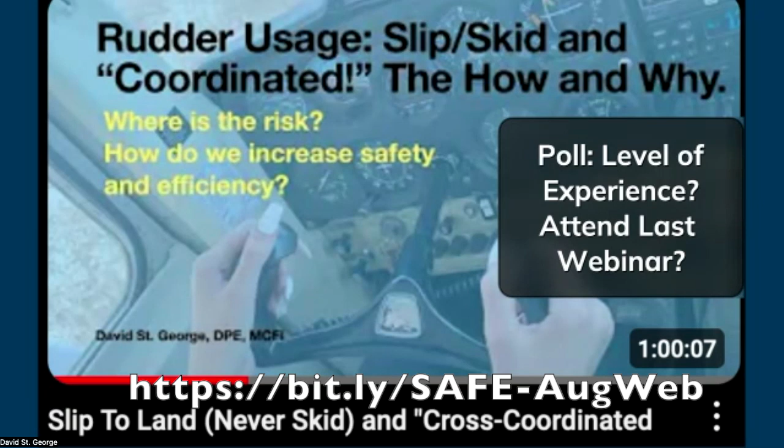As we explained in the last webinar, that's a pro-spin setup. My thought was this woman had 70, 80 hours of preparation for her flight test, and here she was doing it completely wrong. She was going to fail, and she did fail. She'd probably come back after another hour of training and pass, but there's no way we can fix what was done to her as a student. The things she learned were completely wrong, and it's very hard to overcome that initial imprint.

So what we do at SAFE, we're a not-for-profit, we don't sell anything, all we do is give away safety. We have an app online, Safe Toolkit, and a webpage, safepilots.org. I spend a lot of time posting to Instagram, Safe Pilots. I hope you're all getting those resources. We started doing webinars last spring, we did the CFI side of it, and now it looks like we're transitioning a little more toward pilot information.

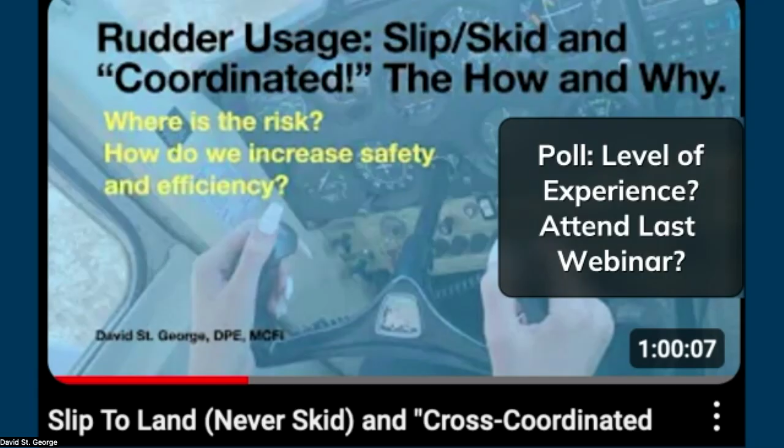So the big focus is stick and rudder tonight. Rich provided this infographic, you'll see it in the chat. The important thing is up top: nearly 80% of general aviation accidents have at least one skill-based error, with this type being the first causal factor in the accident chain about half the time.

In other words, we all fly in a very small comfort zone. I can pop this up a little—you see this area here, we call that the comfort zone. It's probably from 1G up to maybe 1.5, and Rich can probably qualify that. But very seldom in my plane am I going to experience 2Gs, so this is where we do probably 90% of our flying.

Occasionally we'll get outside here into a little more G, maybe a little negative once in a while, and you feel the belt tighten, but we're just happy to be there. What happens in loss of control is we get forced by weather, by ATC, by something out of that comfort zone, and the pilot startles and can't control the plane.

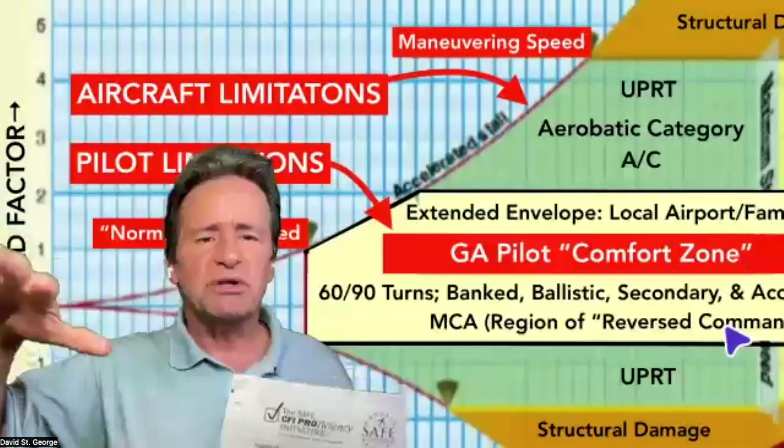So what the extended envelope does, you can see it here, is more of the basic maneuvers you're familiar with, adding a few specialty items. If you look through the syllabus, you'll see turning stalls, ballistic stall recovery, falling leaf, secondary stalls. But my point to pilots is before you go and try to engage in a UPRT course, maybe you want to try that first.

When I was a new CFI, very early on I decided this could be dangerous, and I really wanted to know what a plane looks like upside down. I really wanted an upset recovery, but back in the 80s, they did not have upset prevention and recovery courses. So I went to an aerobatic school and learned hammerheads and a bunch of stuff, but it really didn't apply to my situation. The one thing I see when I read UPRT literature is fidelity—it has to really speak to what your situation is.

So it occurred to me that it was a bridge too far—I was trying to get the wrong thing in the wrong place. What I did was engage this old geezer, a local pilot who's passed on now. I built a syllabus much like what you see in this extended envelope training. It has things going just a little beyond that comfort zone, pushing it out—60 degree banks, falling leafs and secondaries—and it really improves your comfort in those areas. It's a segue into a UPRT course once you know how to use the rudder correctly.

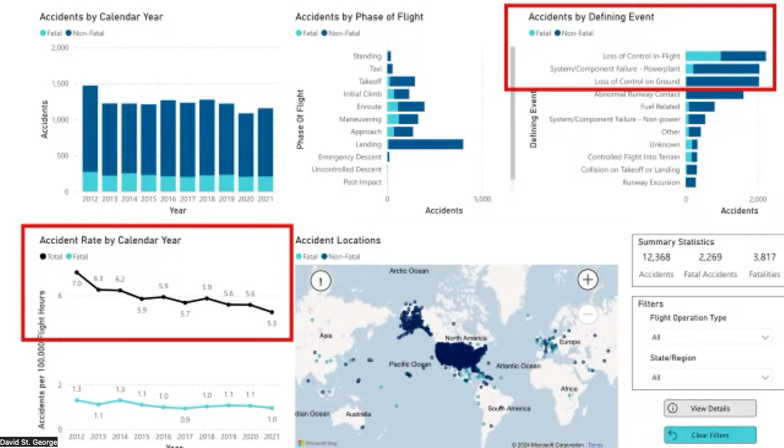Backing up, the NTSB published this for years—loss of control was always on top of the most wanted list. I think they got tired of putting it up there, but if you look at their webpage, and I pulled this up today, accidents are decreasing, you can see that coming down. But at the top of the causal factors is loss of control, and the blue one there, the light blue—I don't know if you can see that—let me put a pointer up.

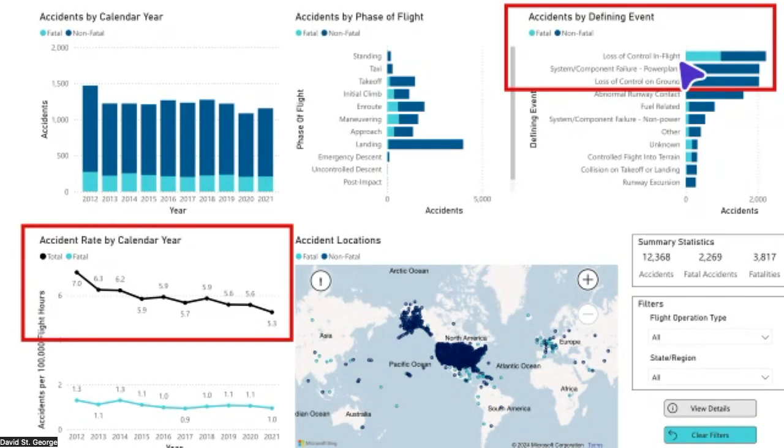That arrow right here, this light blue one, that's the fatals. So it's a very disproportionate number of fatals when you look at the rest of these. Very common for it to be a fatal, even though accidents are coming down, loss of control is still a very prominent problem in the industry. It's easy to forget when you look at things like this that someone died, someone didn't go home. As I say, game over, no replay. This is serious stuff, so practicing and working out of that comfort zone is really a critical thing.

So the course we're talking about is just this, you know, 2Gs, 3Gs maybe at the most, and 60 degrees of bank. I guess 2Gs would be about it at 60 degrees of bank.

So anyway, I'd like to introduce our first panelist, Rich Stowell. Our guest here - this is the NTSB introducing Rich Stowell because he's an expert witness, but his point to the NTSB was, you know, we still have a very big problem in flight training. And I think if you guys are onto the current accelerated flight training, it might not be getting better. It might be getting worse.

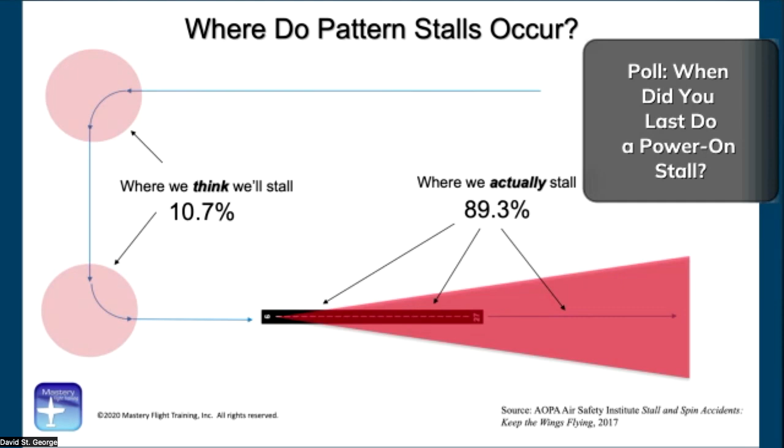Okay, good. All right, so I don't know if you're seeing this too, Rich - Rich's data, he's much more the engineer than I am. I see Greek letters, I start to wilt. But I got about a third probably a week ago, a month ago, a year ago - so it's pretty well distributed. And then down the bottom, some honest souls - 11% said, can't remember, it's been so long.

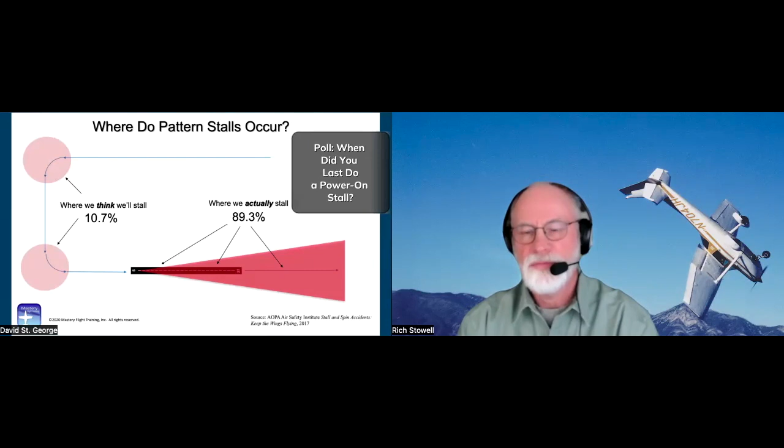So we're talking to the right people. This fact should put a little stiffness into you. If I turn this off, I don't know if I can, you're going to have to bear with me. We go here and switch cameras.

While you're doing that, David, let me just get one clarification about data. I'm a recovering engineer, so let's put it like that. I know when Rich talked to me first about when he learned to fly, he said his first job was in the basement in Manhattan doing plans or something, and he said, this is not at all what I want to do in life.

Anyway, if we take a plane, this would be lesson 1, 2, 3, and I seem to have lost the elevators somewhere down in the studio here, but we don't need that, we just need rudders at this point. As soon as you add the power, it's going to pull off to the left, and you're all going to see that as an early CFI.

As a student, that's part of what goes on. What you have to remember is that when that happens, it's yaw, and what we should be correcting for it is with the rudder. When I do a DPE, sit out there, take a test, and I'm walking around the plane pre-flighting, I'll ask, what does the rudder do? And I get the craziest answers. There's really not an understanding of what this does. So you have to start that right away.

And the other thing we'll talk about is the whole effect of wind on that tail. So still searching for my lost elevator. Sounds like a Jimmy Buffett song.

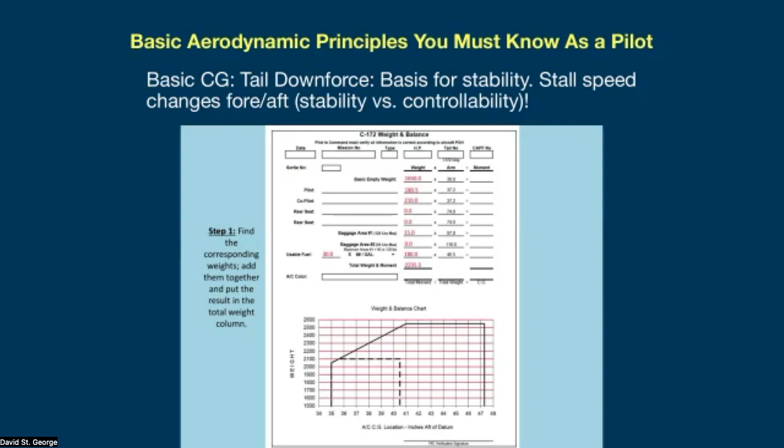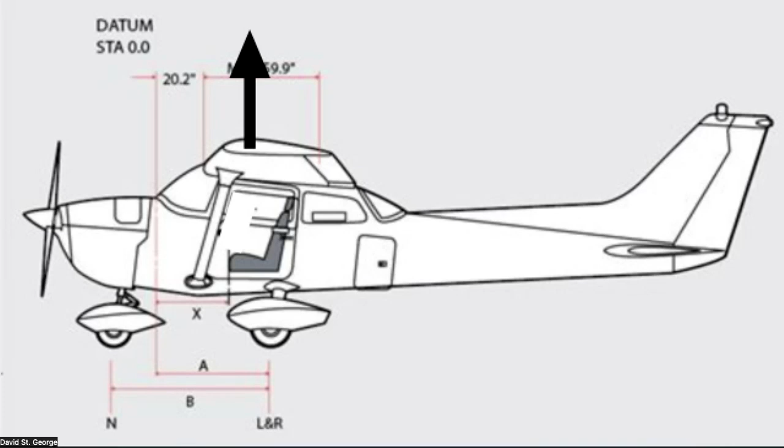Why is there a little box and why is there a big box? What doesn't get conveyed is where that box resides in the aircraft silhouette. If the center of lift is there on the wing, where would you find the center of gravity? Would it be forward of the center of lift, or behind it? Some people might say, as it adjusts forward and back in the envelope, it might be behind. But the fact of the matter is that it really is always ahead of the center of lift.

This seems to be lost in all this decimal point chasing and crazy calculation. People miss the big point that the nose is the heavy part. For most stall recovery, if you just unload the plane and let go of the yoke, the nose is going to come down because it's the heavy end. What does the tail do? The tail provides a downlifting force.

And this you can illustrate to your students in the first flight lesson. If you add more power, the nose of the plane rises, that's pushing wind over the tail. The tail goes down, the nose goes up. If you reduce that power, it loses that downward force and it goes into a series of phugoids until it stabilizes again at a new airspeed, depending on your power setting and where the yoke is. But it's key to everything we're going to do in a plane that you understand the tail lifts down.

The second part of that is this idea that when you add power, you're making more wind over the tail. That affects the elevator, and it also affects the rudder. So people miss that very important point. I know Rich probably has done more spins than I've done takeoffs, but the rudder part is huge for any kind of recovery of a spin.

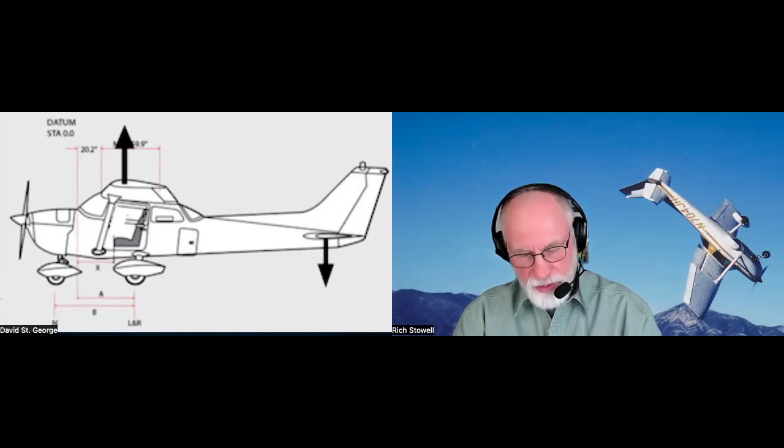Yeah, absolutely. And if we want to talk about the awareness and prevention side of it, because obviously if we're relying on the recovery part, more often than not, it's going to be too late. But being aware that you virtually can't change any other control in the airplane without needing some kind of adjustment with the rudder. Change the power setting, probably need to adjust the rudder, start rocking the wings with the aileron, got to do something with the rudder. In some cases, even pitch changes require some change in rudder pressure. So the rudder is indelibly linked to most everything we do with the airplane.

And so from an awareness and prevention point of view, if we can cancel the yaw ahead of time, we don't have to worry about using a full opposite rudder to stop a spin. I think 90+% of accidental spins occur at or below 1,000 feet, already too late. So we're already in the traffic pattern.

Back to you, David. Yeah, I like that. And the point you made, I think when I was listening last year at Oshkosh, maybe it was you or someone else, every change you make to one control has a secondary and a tertiary level of change. As flight instructors, we tend to just teach ailerons with rudder, and we forget that pitch is part of it. Everything has got to be meshed together.

And the point Rich was making on that infographic up top is we really have to burn these into the student early on. Our learners have to get a feel for the plane, its muscle memory. Because when bad things happen, the cognitive part of it is often, as Ed Wischmeyer says, unavailable. The rudder really has to become habitual and absolutely a best friend of these people.

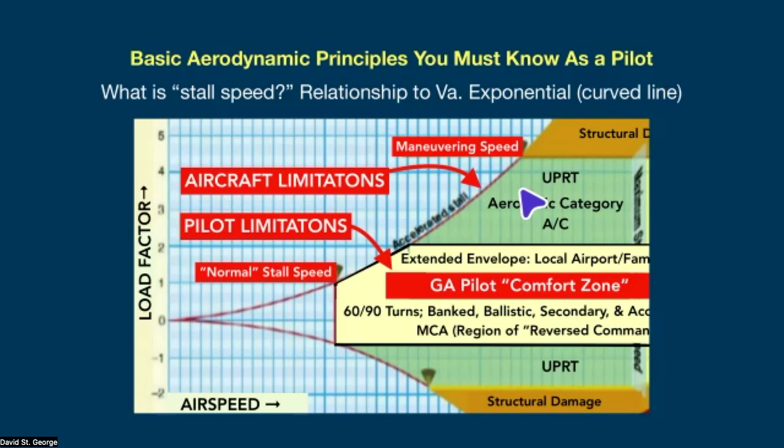We got any questions coming in there? I've mesmerized you all. Yeah, so actually 2 of them, and they are both spins related. One is from Terry Pitts asking the question, for a CFI applicant, does it matter if they do their spin training in something like an Extra 300 versus airplanes that they're going to actually be training in?

It's a good question, but it's the second question that needs to be asked. The first question is, are flight instructor applicants receiving the depth of knowledge and the depth of spin training that is alluded to in the endorsement in their logbook? And the answer to the first question is no. So it doesn't really matter at that point what airplane they're in.

The other issue is something like a Cessna 172, even though it might be approved for spins in a very limited part of its operating envelope, is actually somewhat spin reluctant. And it can actually create a false sense of the airplane's ability to spin. And of course, when you're spinning an airplane like a 172, you're at a forward center of gravity, lower weight, in the utility part of the envelope.

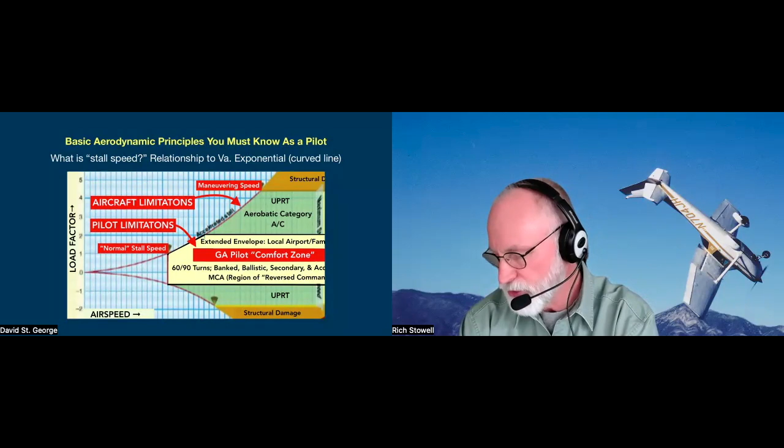But oftentimes, what happens when the instructor gets out of the airplane? The pilot loads the airplane max gross, 3 of the biggest friends they know, and they try to depart off of a high density altitude airstrip, a totally different kind of airplane at that point. So it's much easier to stall spin an airplane with improper control inputs at the aft part of its approved envelope, as opposed to the spins approved front part.

So I would say, first of all, we need to make sure flight instructor applicants are receiving training so that the endorsement rings true and that they are competent to teach spins, which at this point in my experience is more often not the case. And then it doesn't really matter what airplane. I would say you want an airplane that if you command it to spin, it will spin, not 50-50 or 30-70. You want consistency in the spin training environment.

Chances are, if you go to something like an Extra 300, very high performance, but it behaves in a spin like a Decathlon or any of those other classic spin training airplanes. If the question were, if you were going to learn rolling upset recoveries in something like an Extra, all you got to do is tap the stick like that and you're upright. So that's maybe not an ideal transference of knowledge to a 172, where if you had a rolling upset, something like a Citabria or Decathlon might be a little bit more appropriate.

Vince asked the question. He did training in the A7D at 30,000 feet. And of course, an A7 does not have the same mass distribution as most of our light airplanes. He asked, why don't we in general aviation use ailerons with spin recovery?

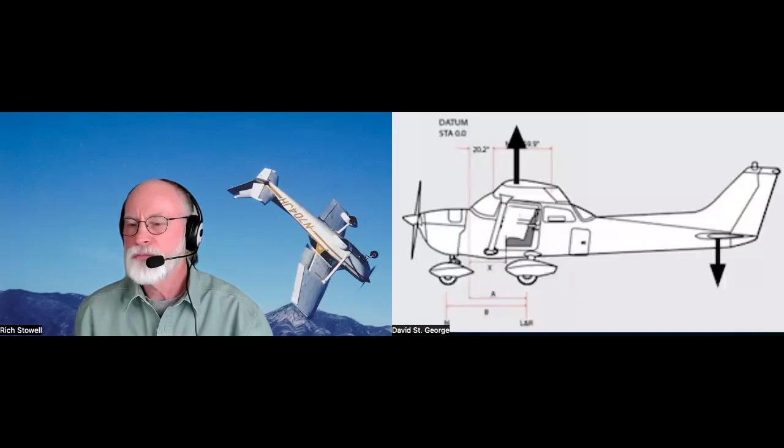And there's the tail, and what I said about the wind on the tail, Rich was the one who really publicized that PARE spin recovery. Why do we get the power out so soon? Well, the power is pushing the tail down. It's making that plane spin flat. It's not going to recover the stall unless the heavy end comes down. So power out brings the nose down and the recovery starts.

You have to understand the very basics, or all of this is lost. If you don't understand this part, the spin part is lost too. Power in and out is a very important motivator of that tail. That's what gives it the force to recover or not.

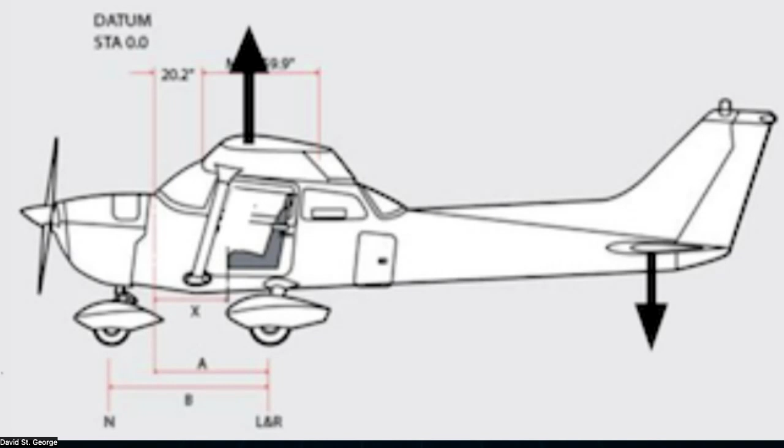Anything else on the spins or questions there, Rich, in the chat? Yeah, so I think there's one question from Howard. He hasn't read the syllabus yet. So Howard, I suggest you go ahead and download that from the link that Nick put up already.

What do we do with primary students to train outside of the comfort zone? Part of that, I think, is to start training less specifically to the test. I mean, that would certainly help. And while we were having our practice session, I mentioned to David, you want to talk about getting out of the comfort zone. Why don't we actually train our students per Advisory Circular 61-67 Charlie change 2, which is the current one, stall and spin awareness training.

It's the required training, and it has a whole lot of different maneuvers in there that are very good maneuvers to do with people, so that when they come to UPRT with me, I see Mike Clock is on the call with us here out of Bend, Oregon this evening.

We spend half of our time just doing the expanded envelope exercises that people like Ed Wischmeyer do, or the extended envelope training that David's talking about, just to get them to the point where we can talk about going upside down in an airplane or doing a spin. So I think there are a lot of things we can expand on naturally in our training environment, in addition to what David's put in the syllabus, but also looking at AC 61-67 Charlie and integrating those elements in. As a flight instructor, if we're not comfortable doing that, we should find another instructor who is and get comfortable doing it so we can pass that on to our students.

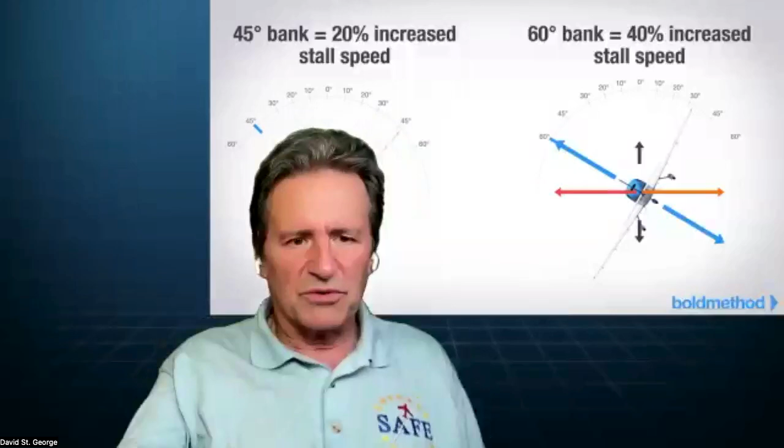But then let's get into this part here, let's see if this will change. Yeah, here we go, and I'm sort of blocking that. Let me see if I can make myself smaller or get out of the way. As we bank, this is how we're adding load to the wings, right? This is the basic square root function here. What's amazing to me is if I were to ask somebody, 45 degrees of bank, how much load does that add to the wings? This is one of the questions I have running on one of my seminars, and I get answers. About half the people say it's got to be at least 2 Gs. It really is only a 19% increase, and it's not scary. 45 degrees is not much at all.

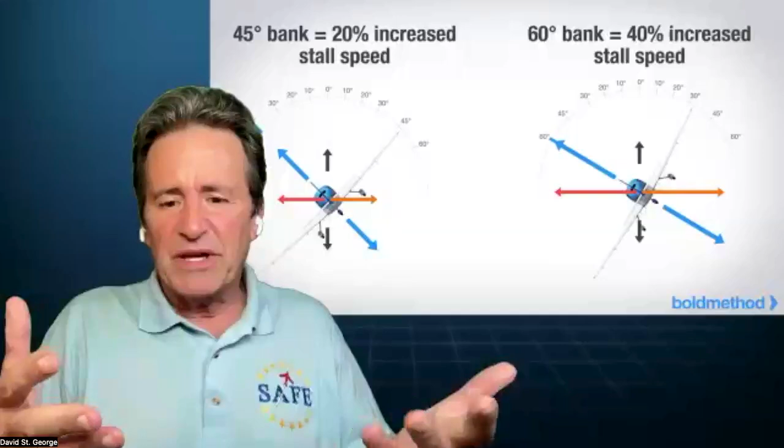What Ed Wischmeyer and myself do in this course is what's called 60-90s. We bank 60 degrees, we turn 90 degrees, and we reverse it. What I used this for initially was when I got instrument students and was going to start them on commercial. You all know an instrument student has been droning along for 40, 50 hours, making standard rate turns, very gentle, staying trimmed, everything's there, and the plane is flying itself under a stable configuration. They haven't banked more than 20 degrees in about a year, or in an accelerated program it'd be different. So I would take them out and do 60-90s.

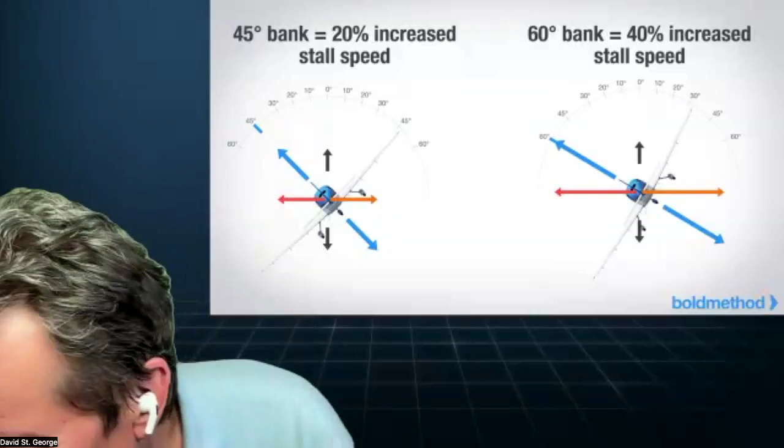We'd do falling leaf. When we do a private pilot applicant in the ACS, it says we can do a 20-degree bank turning stall. Well, we might as well get into it. I don't know if this will show up with the silhouetting, but if we take a plane, I try to get the light on it just right. There we go, and it's turning, it's banking. The lift is where? That's one of the questions at the end, is the lift equal on the wings?

People often say the outer wing is going faster, so it's got more lift and you need opposite aileron. But in a moderate 30-degree bank turn, level and coordinated, the lift is equal on the wings, or it would still be rolling. The ailerons aren't doing anything, the rudder shouldn't be doing anything, yet we see pilots with all kinds of control pressures cranked in there. The only thing working is the elevator, and the elevator is turning the plane.

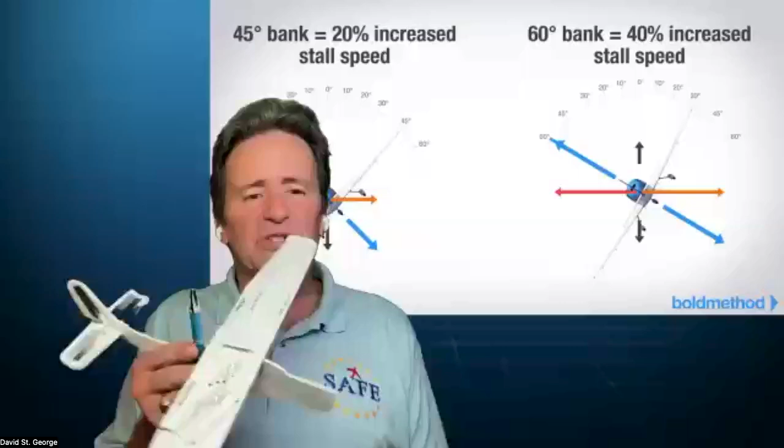This is the whole basis of what Rich teaches, you can go to richstowell.com and see Learn to Turn. The whole idea is people don't understand what the controls are doing in a turn, and the turn is how they get themselves in trouble because they don't understand the forces.

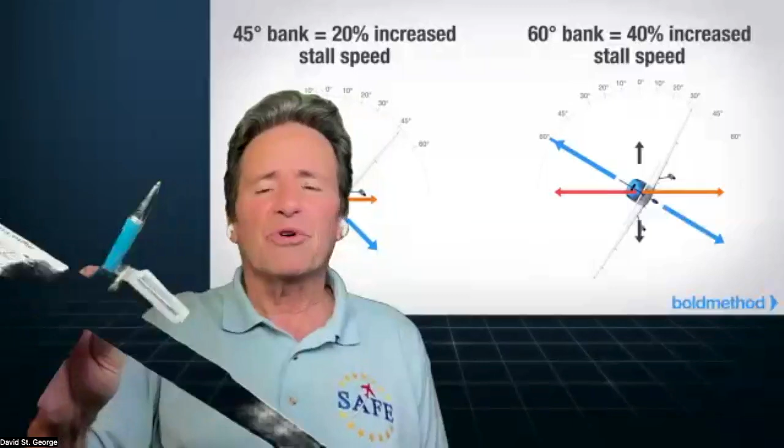This is Aviation 101. It's unfortunate that in most syllabi, people get rammed into stalls on lesson 3 and never really learn how to fly a plane. We're really pushing for lesson 1, 2, and then lessons 3, 4, 5 to be ground reference maneuvers, climbing, descending, turns, before doing stalls. If they get into stalls early, all they're going to do is scare themselves because they're not coordinated. If they learn to use the rudder correctly, it makes all of that a lot easier.

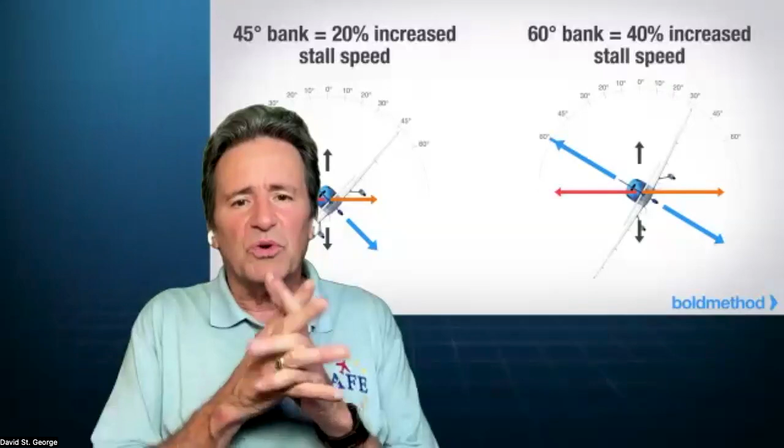The reason we lose people in training is because they get scared and drop out, saying 'I just wanted to have fun flying my family to Maine to get lobster, I didn't want to go up and be an astronaut doing these crazy nose-high things.' At the right time it won't be scary, but if we don't bring them in slowly, it will be. If they understand the physics behind it, they're going to be a lot more comfortable.

So what happens when somebody gets out of this comfort area and ends up here or down here? What happens is, you've probably heard the word mentioned, startle. Ed Wischmeyer talks a lot about cognitive unavailability - basically we panic, the brain shrinks, and it's survival mode. Whatever muscle memory you have is what you're going to react with. If you were trained in those areas and trained correctly, hopefully you will react correctly and survive.

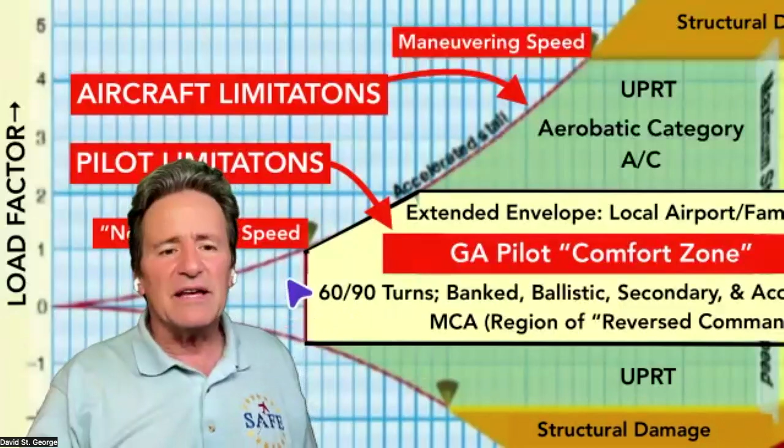But in most cases, people panic and do the wrong thing - they pull when they should unload, because they see a lot of ground, or they add power. My favorite thing is when people are doing spins, the nose is down, and they add power. I still haven't figured that out, but it happens every time - the wrong reaction. So if we're out of the comfort zone, we're vulnerable, especially here. And as Rich said, less than 1G is a big mystery area for most people.

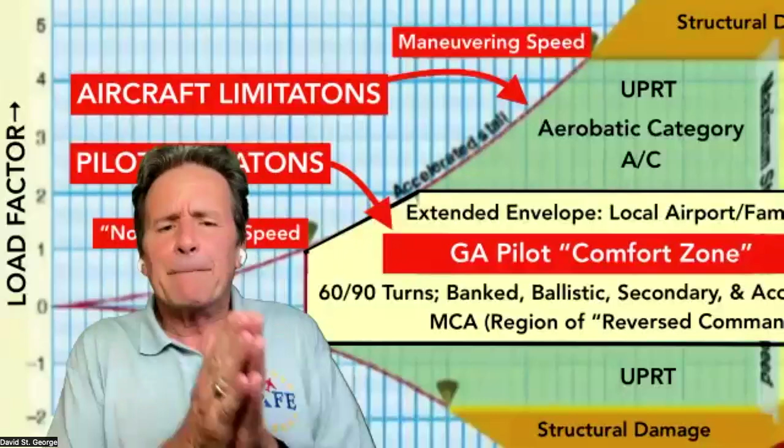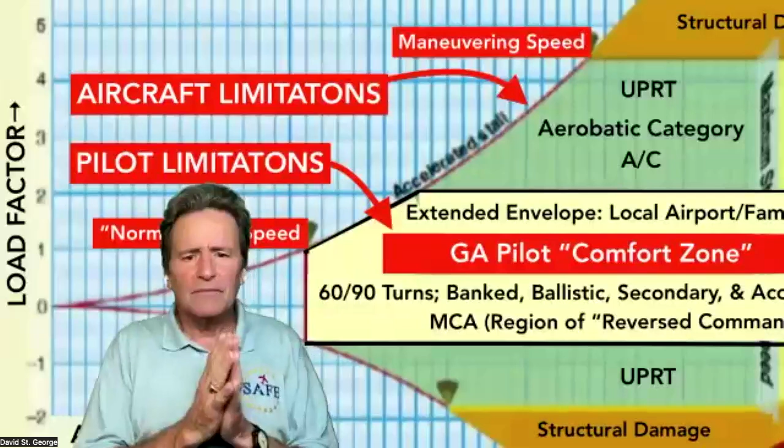Sorry, I didn't realize I had a question. Oh, you leaned on the hand-up button, that's what happened. That was an easy one.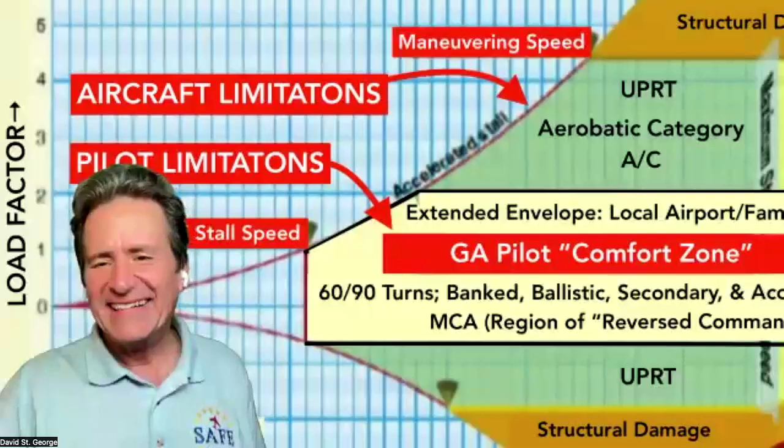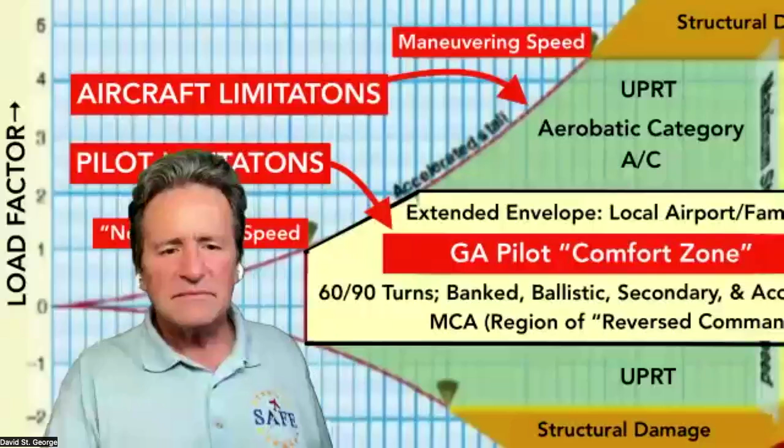I see Brian Lloyd's on board. I think he was doing his spin training in a gypsy moth for a while, and now he's finally got himself a Marchetti. So Casey King asks: since 89% of low altitude traffic pattern stalls occur on departure, has there been any effort to emphasize conditions which make an aircraft more susceptible to a departure stall, like lower control forces or aft center of gravity?

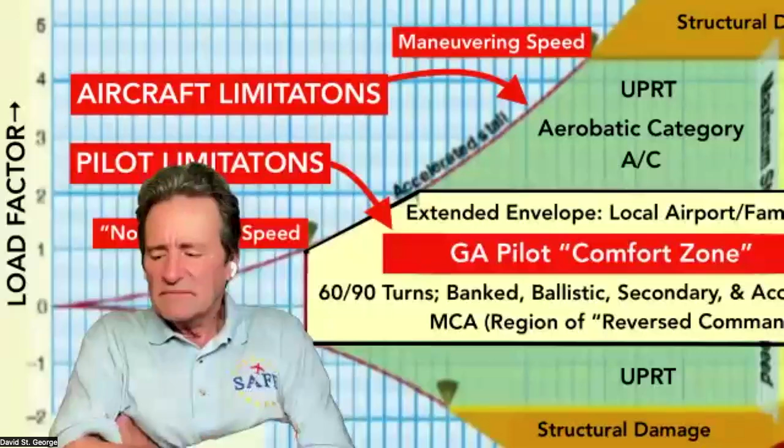Certainly that could be part of it, but generally speaking, I don't know that aircraft are more susceptible. In fact, if you think about power-on departure stalls done as part of check rides or flight reviews, airplanes are a little more difficult to stall because you have airflow over the inner part of the wing and over the tail. The real question is what is the pilot doing? Pilot actions have performance consequences. If we get distracted, have an engine hiccup and get startled, maybe we want to show off or we're subject to a hazardous attitude in front of friends during departure, and we try to maneuver the airplane when it's not really capable of doing that just yet.

All of those things can lead to the departure stall, but ultimately, unless it's an aft center of gravity where it's loaded in such a way that the airplane will stall in the departure phase even though the pilot hasn't added back pressure, more often than not it's something the pilot is doing. In other words, pulling when they shouldn't be triggers the stall. David, maybe you have some other insight on that as well.

Yeah, I just got the silhouette finally off, and I wanted to make that takeoff as people lift the plane off and they're going. I try to get this right in front of the camera, and it's yawing this way, and they don't have right rudder in there. I think that's a lot of it. Plus, we have some very high-powered planes that people are doing primary training in. Tuesday, I have a Cirrus guy that I'm doing a private pilot test in. It's just amazing to me, that's a lot of ponies to control, that's a lot of pressure.

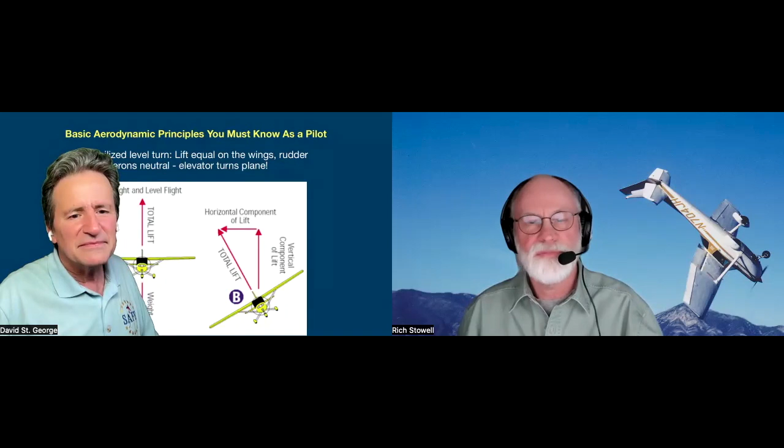It looks like David Dorn has his hand raised. Maybe we can ask him if he has a question. No, I didn't—thank you. Yeah, I just wanted to make a point here.

This is what UPRT and all of this training is trying to combat. Every one of us, if we've flown any amount of time, has at some point scared ourselves silly, back when we had to use charts and actually find the airport, not like now when it's always at the end of the pink line. I remember not finding it as a student pilot 50 years ago. But when it happens—UPRT, when we get forced out of that comfort zone, upside down, sideways, wake turbulence—the startle is what's going to take you away. You just stop functioning, and it's not anything you can train away except by having absolutely ingrained instinctive responses.

If I went back, I should just play this one more time—if you can spotlight my screen there for a second, Nick. You're taking care of David.

Hi, I'm Rich Stowell. Aircraft accidents tend to happen whenever task requirements exceed pilot capabilities. Loss of control in flight, especially while maneuvering, is the top cause of fatal accidents in general aviation. Developing your stick and rudder skills to the point where the mechanics of flying become automatic will give you the confidence to respond correctly to an impending loss of control. But more importantly, better stick and rudder skills will free up additional mental energy that can be used to improve prevention and recognition skills such as threat and error management, aeronautical decision-making, and situational awareness. So please, practice your basic flying skills and be safe.